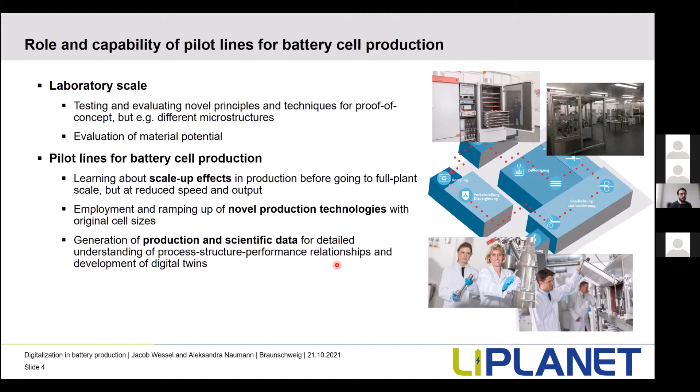One important part, especially for digitalization, is the generation of data. Data is the most important thing when looking towards research and digitalization in production facilities, because we need a lot of data to gain insights into the process. This is the great thing about pilot lines - we are able to gather as much data as we want and use that for our specific use cases. As we're talking about digitalization today, the aim is understanding the process-structure-performance relationships. You will hear this term quite often, to better understand the complexity behind single processes and products along the production process, and try to improve certain steps.

Now we will jump quickly into the timeline of the Battery Lab Factory. I don't want to give you deep insights of the Battery Lab Factory Braunschweig, since I think most of you are already familiar with it, but just a short overview. You will get the slides in the end of the presentation anyway, so you can use that as reading material.

Or if you want to get in touch with us, talk to us. We started in 2007 with our first activities with industry, looking more closely at battery production. The first process we looked at closely was the calendering process, understanding the interrelations of calendering within the production of single cells. In 2014, we started with the official building of the Battery Lab Factory Braunschweig, which was funded through an EFRE project we got in 2011.

So now we have an in-place facility with different dry rooms and a large facility for testing and evaluating the production process. The Battery Lab Factory is part of the ProCell cluster, which is a German excellence cluster, a German competence cluster, looking at the production process of lithium-ion battery cells since 2016. Professor Kwade, who is a professor at the Battery Lab Factory Braunschweig and the iPAT, is the head of the ProCell cluster.

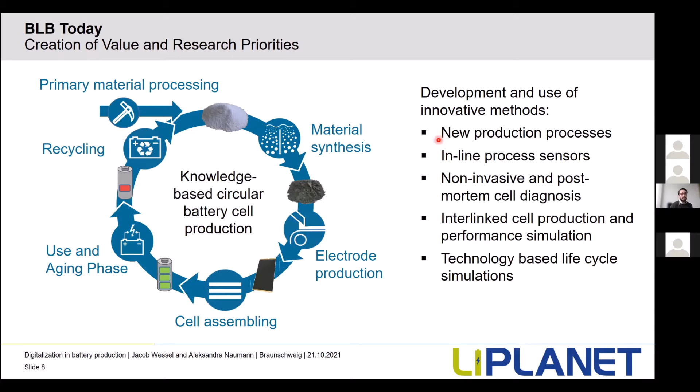We focus mainly on new production processes, so we do not look in detail at new cell chemistry or cell technologies. We do that, of course, but the main focus of the Battery Lab Factory is on the production processes, and here trying to improve those by means of new technologies. So something like inline process sensors are, of course, important, understanding a bit better what actually happens inside the process.

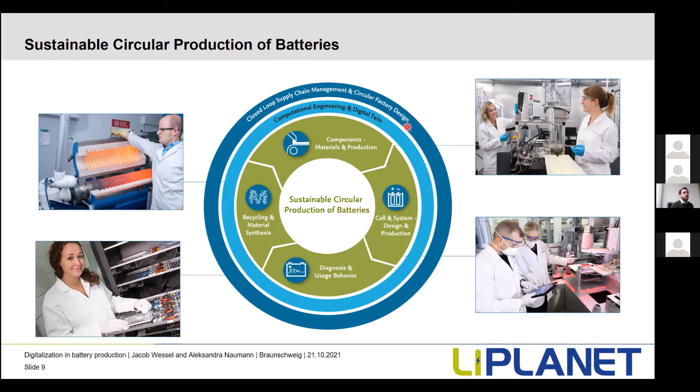I've touched on that earlier today, just a few minutes ago, but I want to explain it a bit more in detail why it's so important.

The battery production system itself is quite complex, as we all know. It has many different challenges, many different products and processes, and all those processes and products are interlinked and have interdependencies along the way, influencing the final product.

What is complicated and difficult to explain is the interrelation between a process and the final received property of the battery cell. So how does a single process influence the final property of a cell, for example, the discharge capacity.

There's no essential understanding on that yet, and we try to build that by going the way of process to structure and structure to property.

We understand quite well how a single process influences a single product, an intermediate product in the production chain itself. So how does the mixing influence the structure of the slurry that is produced? We know that, and we can describe quite well the properties of that single product, the slurry in this case.

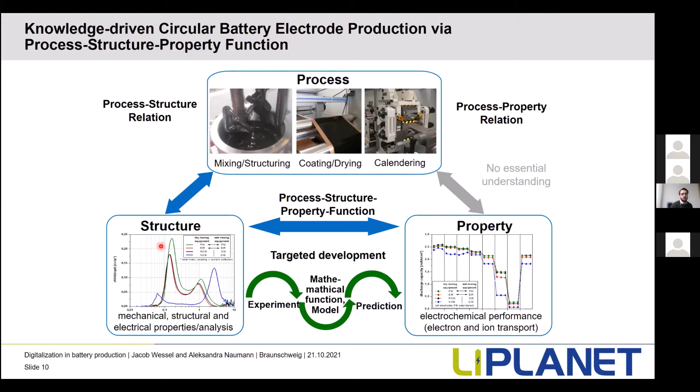So you will see how we embedded this process with our facility, how we go from process to structure and from structure to property in the next couple of hours.

I've mentioned that before. Today we are here mainly focusing on computational engineering and digital twin. What we aim for here is to foster a comprehensive understanding about data acquisition, data storage, and how to enable, by those two important parts, a cyber-physical production system, hereby bringing knowledge back to the production facility by the means of gathered data and analyzing and understanding this data.

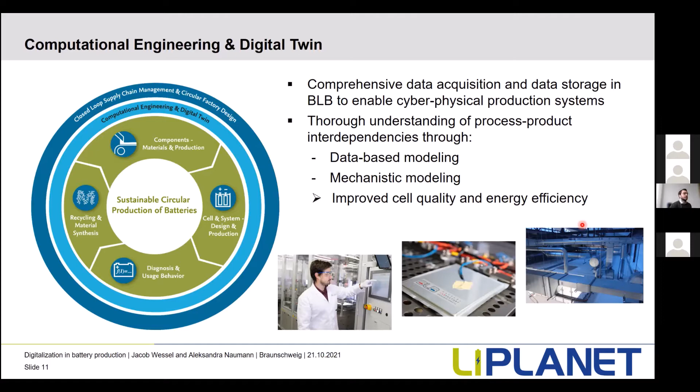After this introduction, I want to continue with the motivation and introduce the most important term, which I've touched on previously: the cyber-physical production system.

When talking about digitalization, you immediately think about Industry 4.0, because those two terms are quite closely linked together. Digitalization and Industry 4.0 are not the same. This is quite important to say, but digitalization normally comes before the part of Industry 4.0.

Digitalization is a term that has been around for a couple of years, starting with the third industrial revolution. I will touch on that later. Industry 4.0 takes the means of digitalization and scales them up, further using them to better understand the insights of your production facility by enabling cyber-physical production systems, digital twins, whatever you can think about.

Industry 4.0 describes the fourth industrial revolution. Some people call it a revolution, some call it the evolution. I don't want to touch on that today. I just want to talk about where it comes from.

We started with the first industrial revolution, as you all know, by introducing mechanical production plants powered by hydro or steam power, which scaled up the productivity of a production environment, previously done mainly by manual work.

The second industrial revolution introduced the term of mass production, with the first production chains, which introduced division of labor, hereby increasing again the efficiency of production systems by dividing tasks to specific workers, and workers performing this task and increasing their activity efficiency.

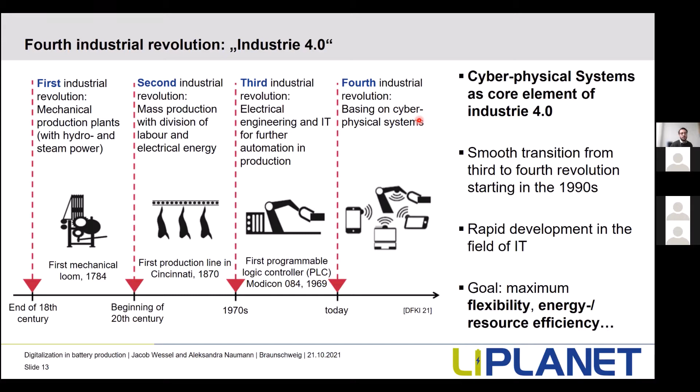With Industry 4.0, you're able to reduce lead time by avoiding discontinuities, like scaling up your production, speeding up your production, and better knowing what happens when you do so. Also, which is quite important because we are from the Institute of Sustainable Production, you can increase energy and resource efficiency through digitalization and Industry 4.0, using less energy and less material.

In specific for cell production, it's quite important to reduce scrap, and hereby reduce the environmental impact of the single production system or the product on the environment.

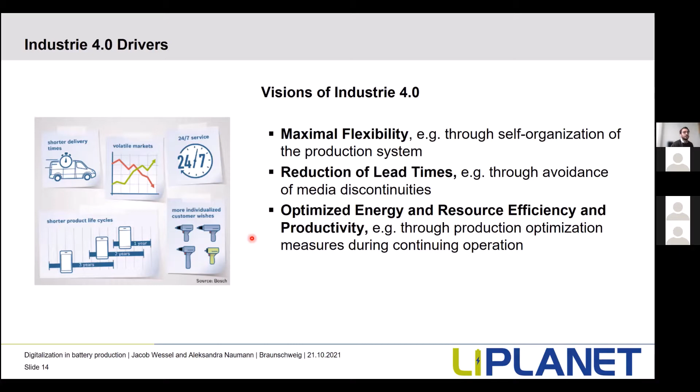So we have talked about the cyber-physical production system before. Now I want to introduce the different elements of how we understand a cyber-physical production system. In general, it is divided into four elements: first, the physical world; second, data acquisition and management; third, the cyber world; and fourth, decision support and control.

What we understand behind the physical world is basically the business understanding—defining your process, explaining your process, knowing about the process, what you actually physically see. In this case, it can be a factory, a single process, or a product.

This physical world is connected to data acquisition by means of different technologies. We will talk about industry communication protocols later on, such as OPC UA, Profinet, and Modbus—there are many more, and we will give an example later. But we also have a lot of manual data, or just data that you want to have within your databases to later use for different approaches.

Data acquisition is also a topic we will talk about later. There are different parts and elements within that element: data acquisition, data management, and also data provision—how we can provide data to the next element, which is the cyber world.

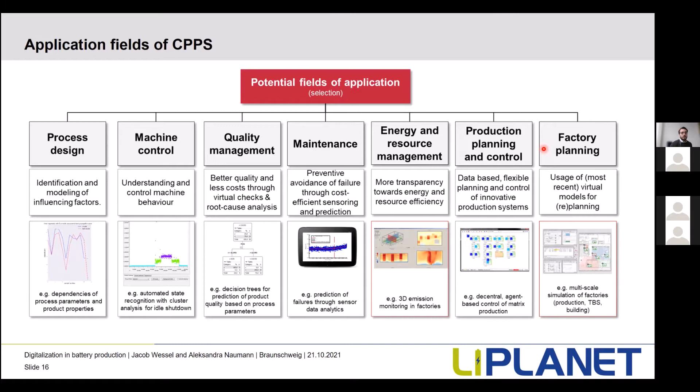Energy and resource efficiency is quite important, also using visualizations, using data that is gathered, making logic of the data, showing the worker how the energy was consumed during the production. Increasing transparency is quite important, but also factory planning comes with the cyber physical production system. By knowing better about your system, you can better plan your factory, either by adapting the facility that you have or using the knowledge that you gathered for new planning cycles. With that, we're done with the first part.

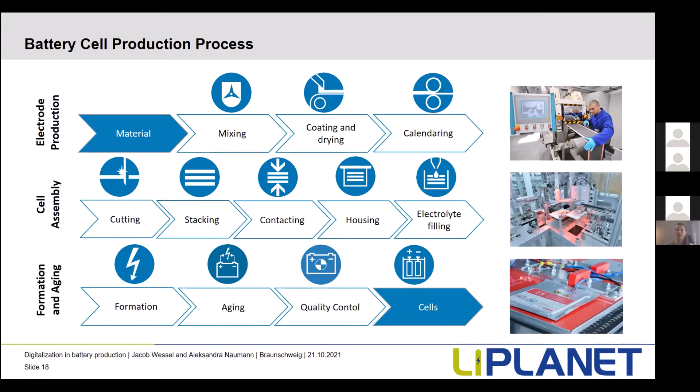The challenges in battery production are that we have many process steps that I just mentioned. They are very complex and they also depend on each other, with all the input parameters, requirements and restrictions on the left, and on the right the quality criteria, which are very important, of course. To obtain the best quality, we have to see that there are many influences on the production process. We have different challenges, for example the combination of continuous and discrete manufacturing: continuous manufacturing in the very beginning, and discrete manufacturing in the end.

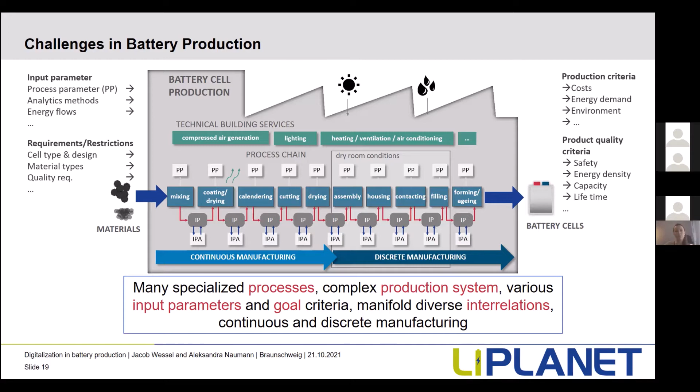Other influences are, for example, the technical building services, such as the dry room conditions which we have for some of the process steps. This just means that we have many variables and parameters that influence our process, so it's more difficult to have a fitting quality management system, which is also shown here. We have many different process steps with all the parameters and product properties, and also intermediate product properties. And these are all challenges for quality management in the end.

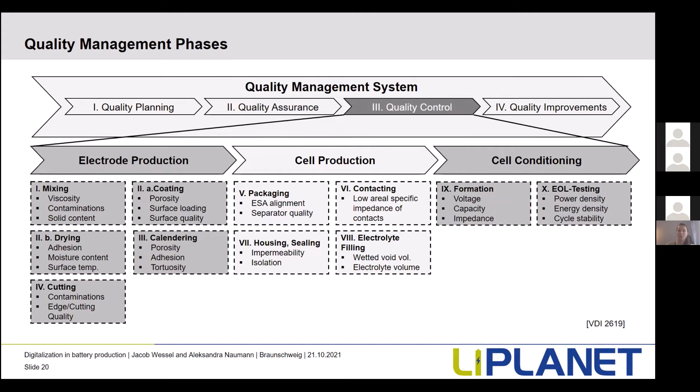As for the data acquisition, which is the next step in the cyber-physical production system, we have different goals, especially the economical feasibility, which means we need fitting information and communication technology, which also supports innovative systems. So we also need high temporal and spatial resolution of the data, because all the data we gather is the basis for what we do in the cyber world. And if we don't have sufficient data, we might not have the results we would like to have for the quality in the end.

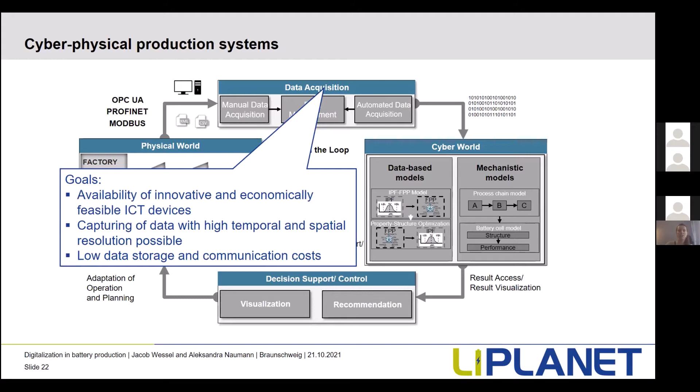And for the economical feasibility, we also need low costs in data storage and communication. I would like to show you now how we did this in the BLB, what our data acquisition concept is. First of all, we of course have the physical world with the machines and the processes, and the cyber world as well. In the physical world, we have the data acquisition, which can be automated data acquisition or manual data acquisition. Since not all the data can be collected automatically, we also have the manual data acquisition.

But for the automated data acquisition, we have the machines that can gather data, and through communication protocols like OPC UA, it can be transferred to the cyber world. In the physical world, the manual data acquisition is also a possibility for data that can't be collected automatically. And for this data, we need someone to type in or to upload the data in any kind to the cyber world.

And between those two, we have the tracking and tracing, which is some kind of combination between those two, because we have automatically gathered data and manually acquired data as well, like operational data. And all these data can be combined in the end in a data warehouse in the cyber world. And the data gathered in the data warehouse are the basis for the visual analytics or data mining methods, or any other use you might have for the data.

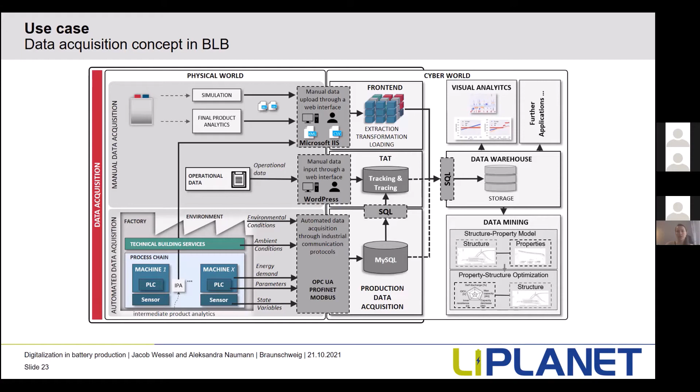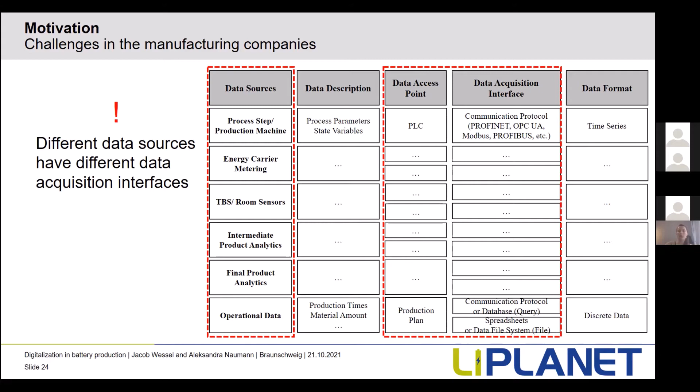So the key message of this is that we have different data sources, and therefore we need different data acquisition interfaces. The data sources can be very different. For example, the most simple case, I think, is the production machine. And for this, we might have the data access point of a PLC. And the data acquisition interface would then be the communication protocol like OPC UA. But we can also have many other data sources, and therefore also other data acquisition interfaces. And we have to combine all of these to be able to make other statements out of that.

Originally, the industrial automation pyramid was used to show the different hierarchy levels in a plant. So the interfaces were between those different levels. But with more complex applications, we now have a CPS-based automation, which means we have many different modules which are linked through different interfaces, and we don't have this hierarchy anymore, or at least not to this extent.

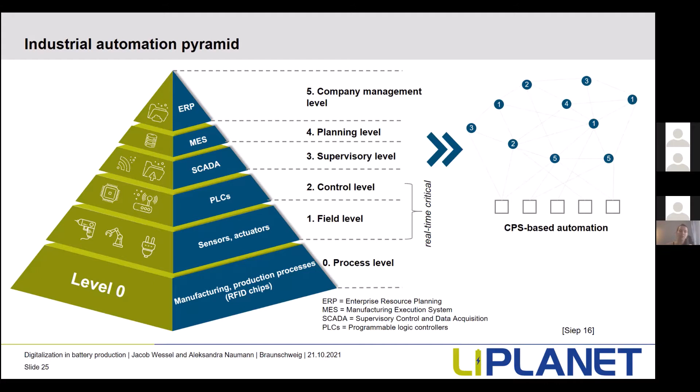For the communication itself, we have different participants or different possible participants of communication. The most simple one is the human-to-human communication through language or body language. Then we have the human-to-machine communication, which might be through different interfaces or simple dashboards, for example, cloud services. The machine-to-machine communication is something like grid computing, and we also have object-to-object communication, like the IoT. And between those kinds of communication, we also have analogies, which are easy to explain with the communication protocol.

So the communication protocol is basically just a set of rules to make it easier to communicate between different machines, for example. And it gives a frame for this communication and ensures that all the partners just speak the same language and understand each other. If you imagine two people speaking to each other, that's quite similar. One person says something and the other one replies. It's quite much the same with communication protocols. One asks something or says something and the other one replies.

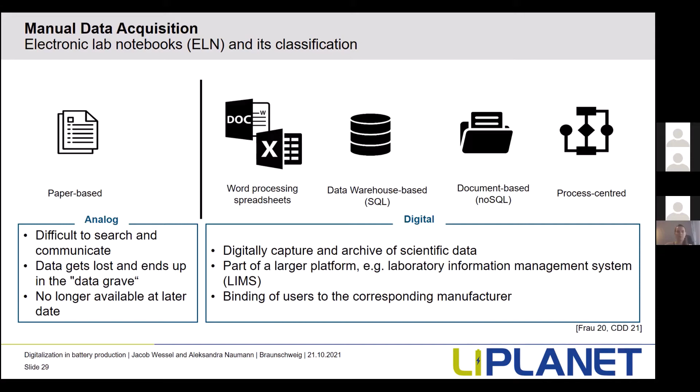And through this interface, also data upload and download is possible. This is especially important for the manually acquired data. And the whole data warehouse is based on Microsoft IIS. This whole thing again reminds us of the different data sources, since we have the combination of automated and manually acquired data again.

Next, I would like to talk about tracking and tracing, which is quite important so that we can see the interrelations between the different process steps and trace back material we used. Traceability is very important for the quality management, and the word traceability itself is the ability to trace the history of application or location of an object, while tracking means the other way around. So we go from the start to the very end with one material, for example.

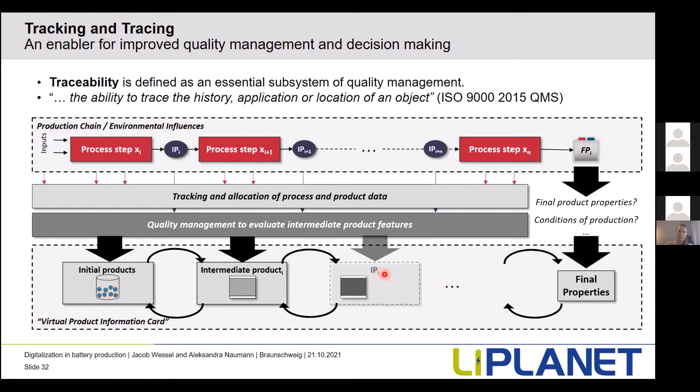And like I said before, all these products or intermediate products influence each other, and if we are successful with our tracking and tracing and other things we can use, we can trace back the properties and also the interrelations of the intermediate and final products.

We have a solution for this in the BLB as well. The tracking and tracing platform, which we can use for production planning, and we can allocate the used material through this tracking and tracing platform through an HMI, human machine interface, at each process and machine. And so we can see the product history and trace it back.

Next, I would like to talk about the data storage and management after we have seen how we can gather data and how we can trace products back. We want to store this data and manage it. Therefore, we need to understand what the difference between data storage and data management is. Data storage, first of all, is when we know what type of data we have, where we have it, and how the software or hardware holds, deletes, backs up, and organizes the information. And the data management is more of a practice of constructing this framework we need to store the data and to archive it.

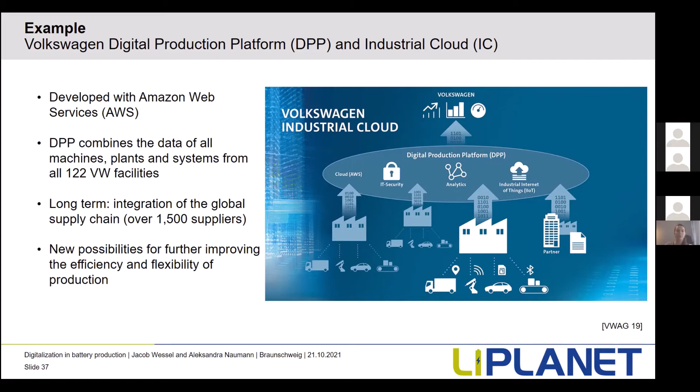And one example for a platform might be Volkswagen. They combine all the data of the machines and plants they have from their 122 facilities. And over a longer term, they also want to integrate the supply chain as well, so that they can improve their efficiency and also the flexibility of the production. And therefore, they use the digital production platform and an industrial cloud.

Next part would be the cyber world and decision support. First of all, I would like to talk about the modeling and simulation. As you can see, we're in the cyber world right now, and for the modeling and simulation, our motivation is to predict the behavior of processes, machines, and production systems, as well as factories. And now we could ask ourselves, why are we even modeling and simulating?

These are quite recent examples where simulation was used. You can see they all have something in common, that they use simulation or modeling. And the reason for that is that simulation helps us to describe systems that are just too dangerous, expensive, or complex to explore experimentally. And additionally to that, we can also visualize the systems, which might not be possible as well in the real world.

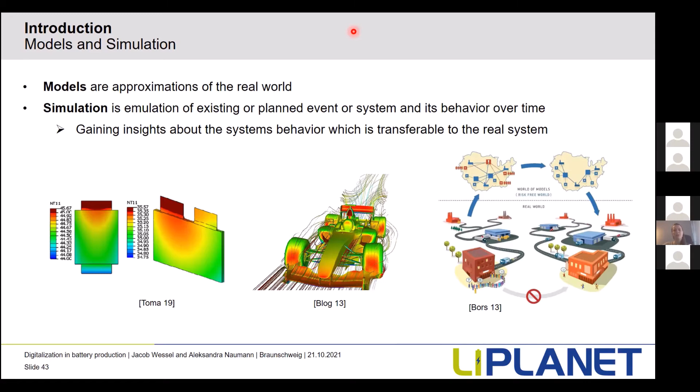The models are essentially approximations of the real world, and simulation describes, I would say, the practice of emulation of events or systems over time, so that we can gain insights into the behavior, which we can then transfer to the real system. And there are many different benefits besides the ones I just mentioned. We can also explore processes that just rarely happen in reality, just to understand the dynamics of this in a better way.

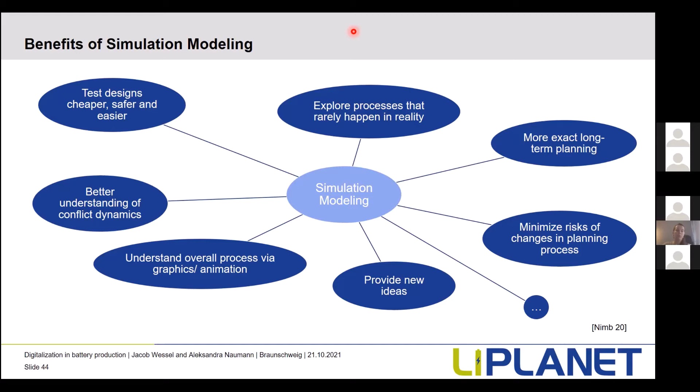And we can, of course, plan more exactly based on our simulation. We can have new ideas through this simulation. We can visualize and also minimize risks before we invest in something that just wouldn't work for us. The different types of modeling are shown here. First of all, we have the physics-based modeling. Therefore, we just have physical principles and mathematical models that are based on these physical principles.

The second one is the data-based modeling. For this, we have gathered our data that we just talked about, and the data describe the aspects of the model, for example, via regression analysis. The third one would be the numerical modeling, which is, for example, CFD or FEM. And therefore, we have the objects which we can decompose into smaller elements. If you think about CFD simulation, for example, we have different simulation cells that are just smaller elements of the bigger one. And then we can look into the specific cells and see what's happening there.

One possible application for that would be weather forecast, where you can see it every day, so to say. The fourth one is the Monte Carlo modeling. It's used for different outcomes. So we have a model with always the same input parameters with different outcomes, which cannot easily be predicted, and therefore Monte Carlo can be used. For example, in the finance sector, but also in engineering, of course.

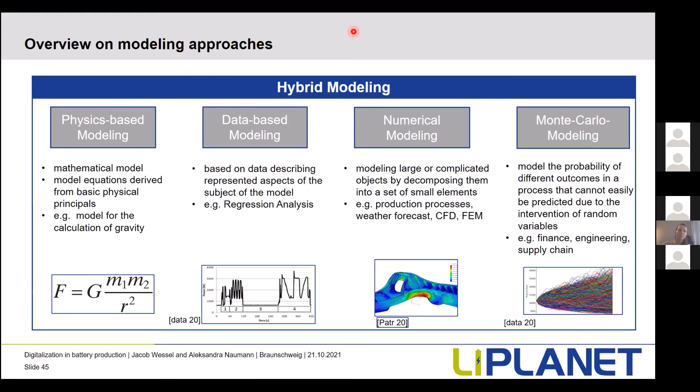System dynamics and dynamic systems are other modeling ones as well. For system dynamics, the behavior of a corresponding system is described, and it can be used, for example, in supply chain management. Dynamic systems, on the other hand, is based on mathematical models of dynamic systems, which consist of state variables and equations.

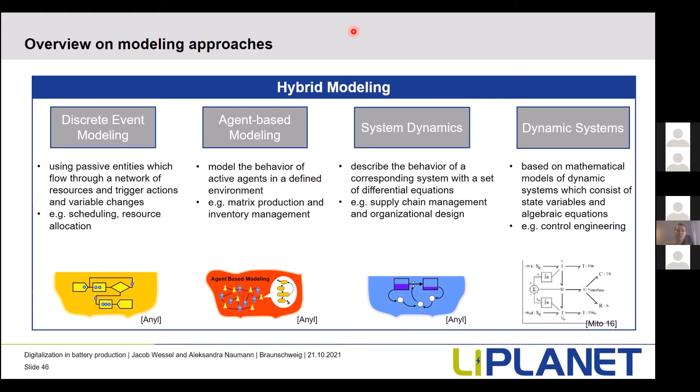These different modeling approaches can be combined, which would be called hybrid modeling. So different modeling paradigms are therefore combined, and it's becoming more and more common practice since the systems we model are getting more complex.

Another approach is multi-level, multi-scale simulation, which means we can simulate multiple levels, for example, from a process over a workstation to a whole factory. And we can also simulate multiple scales, from molecule to material properties, or from seconds to decades, which means over a bigger time frame.

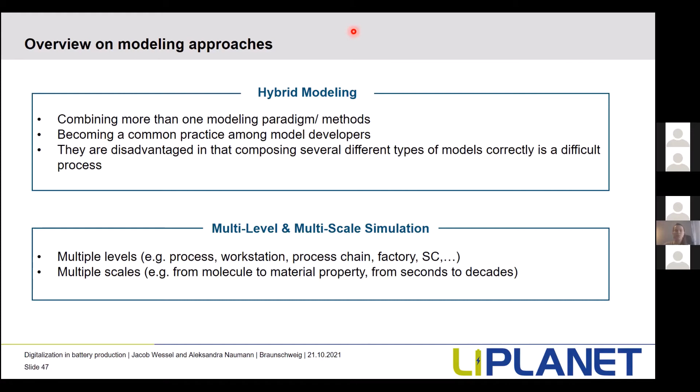One example I brought today for mechanistic modeling is the project Sim4Pro, where we have a process chain model connected through structural parameters, where the process steps are connected through structural parameters. We also have a structural surrogate model to model the structure of the electrodes themselves, so that we can link that structure back to the process again.

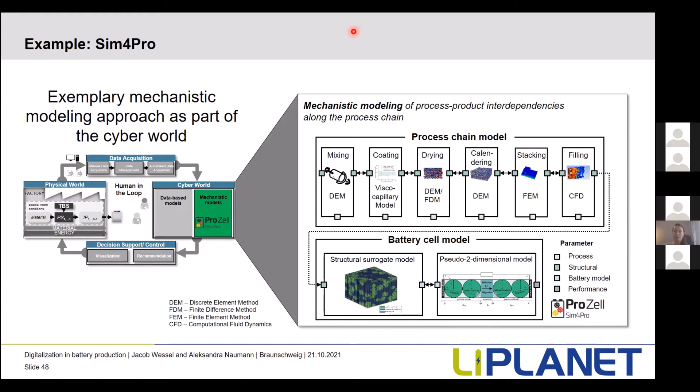Okay, so now the data analysis and data mining follows, and I would hand that over to Jakob again.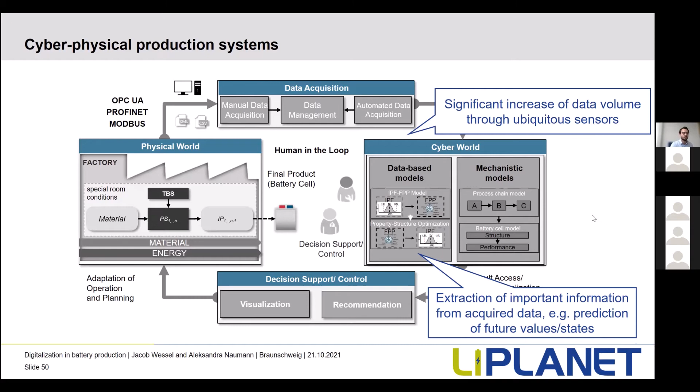Perfect. So we will start first with a brief introduction into the terms that are important around data acquisition, data mining, and data analytics. When you normally look to find papers, ideas, and previous knowledge about this topic, you normally first stumble upon the term knowledge discovery in databases, the KDD process. The KDD process basically describes the process of how to extract and discover information and knowledge within databases.

Within the selection step, the target data is selected. So basically, you try to sample your data, look at the data that you want to use, maybe perform the first correlation analysis to see, okay, does the data actually help me or not?

In the next step, the pre-processing, you process this data. You try to fill in gaps. So missing data is either excluded or you try to include it by means of statistical analysis or whatever you can think of. Also, normalization of your data normally occurs, so that you scale your data within 0 and 1, so you don't have the absolute values, but the normalization of the values.

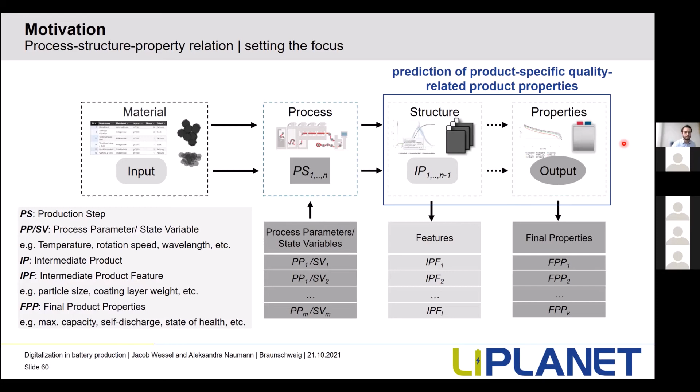What we have done in the recent past is a data mining project. We included in our data mining project about 200 cells, Z-folded pouch cells, with 15 or 10 compartments - so 15 anodes and cathodes, or 10 anodes and cathodes within a pouch cell.

We have described before our data acquisition, how we actually achieved the gathering of all the information along the process chain. We've seen this picture before, and the map of the battery cell production enabled us to gather all the information on the different intermediate product features along the production chain, to know what information we need to gather and how that can be summed up in a database for our data mining project. Here you can see a simple image of our pouch cells.

So first, we stuck, of course, to the CRISP-DM process, which we described, and we performed the basic tasks of data preparation. We started with about 1,000 intermediate product features describing the entire production process. So all 16 different intermediate products were described by their intermediate product features, and the 16 products brought us 1,029 intermediate product features.

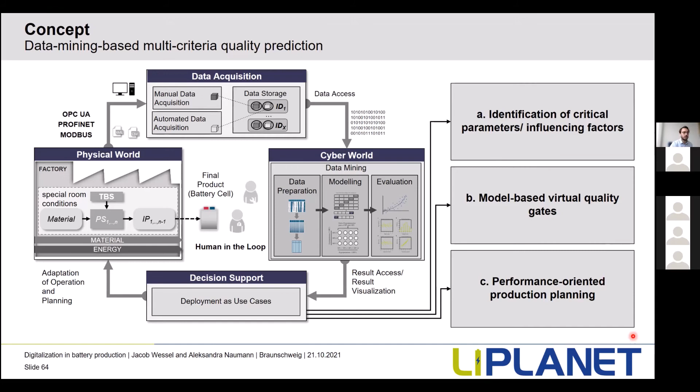I just want to focus today on the model-based virtual quality gate, because I think it's quite handy and a cool use case, and good to explain. So, quality gate—I've tried to explain that briefly here again with some pictures.

So what you can see here is just the production chain with its influencing parameters, described by a production step, an intermediate product, and a later final product. Each intermediate product can be put into context with its quality and the intermediate product state.

So the intermediate product quality can be determined within a quality gate. That information, which you can see here just as a sketch, can be used to determine or predict the final product property. Here we focused on self-discharge, max capacity, capacity decrease, inner resistance, and OCV. So we can determine with the intermediate product state the final product property, and we can go along the process and determine if the intermediate product changes, how that actually impacts the final product.

In the first quality gate, we see we are within our ranges that we set, within our target value with its ranges. In the second step, we see we are now outside of those values, and we can predict with that the final product property and see that the FPP has shifted.

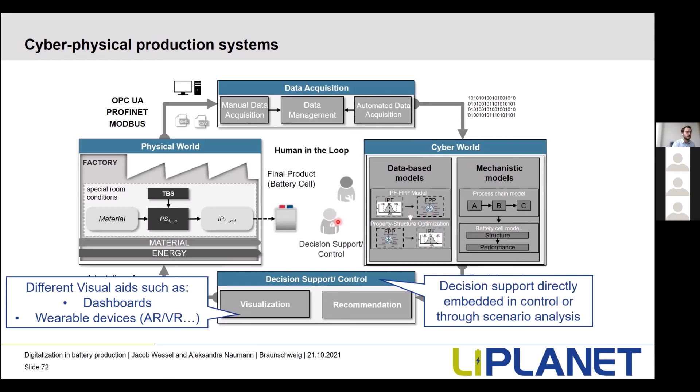I just want to briefly talk, really briefly, about decision support and control - the last element of the cyber-physical production system. I've already shown some works towards that within our data mining use case. Quality management and model-based quality gates, of course, can also be deployed, as you've seen, within the decision support and control element.

First, when you talk about decision support and the feedback loop back to the machine, you have to think about how a human and a machine interact, and compare, of course, a human to a machine, because you will always have the information brought back to the human. The human needs to take this information, that knowledge that is gathered through either the simulation or the data mining or database models, and bring that back to the process and to the machine.

And there you can look, of course, machines and humans are similar in some ways. We have cognition, that is basically the sensor in a machine. We have senses, and sensors also in the machine, and we have actors, our arms, our fingers, whatever you can think about, and we have also the actors at the machine. So either the gripper or the extrusion unit, whatever you can think about, and we have an interface to communicate with that. And the communication with that interface can be a simple computer, it can be an HMI device, it can be a lot of different stuff, and the interaction between a machine and human is quite important.

So giving the human an opportunity to step in contact with the machine and the process, and giving new information to the process, or maybe adapting the process in some ways, is quite important. You can, of course, foster an understanding of what is actually happening by process monitoring. For that, you can use real-time visualizations, dashboards, monitoring devices. You can, of course, have simple lights on your machine. Is the machine running according to plan or not? Can you maybe adapt something there? That can be, of course, offline or online. There's a lot of different stuff out there.

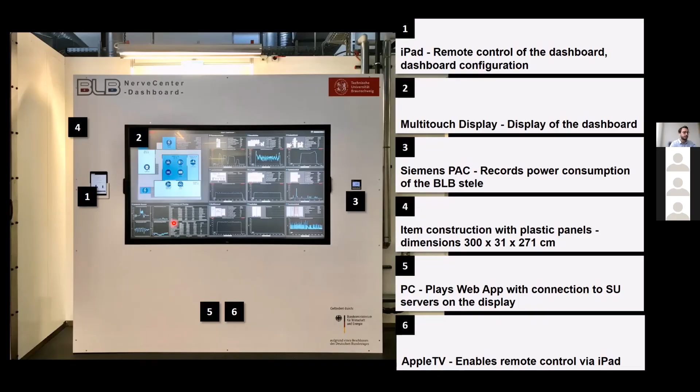Here is a closer look at our dashboard. It's a web-based dashboard which enables us to visualize different web pages within those different images. We use standard technology for that. It's the iframe technology, similar to YouTube, where you have different web servers behind those different iframes, each visualizing one certain web server with its visualization.

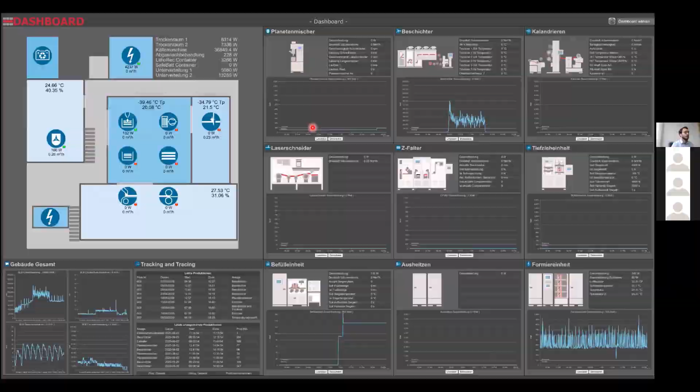Apart from simple transparency through monitoring, you can, of course, use technologies such as virtual reality or augmented or mixed reality in production environments. You can use virtual reality to test something, to test a new process, to see how you can interact with the process. You can, of course, use it also for education. So if you want to educate your worker or even the student, virtual reality always helps here.

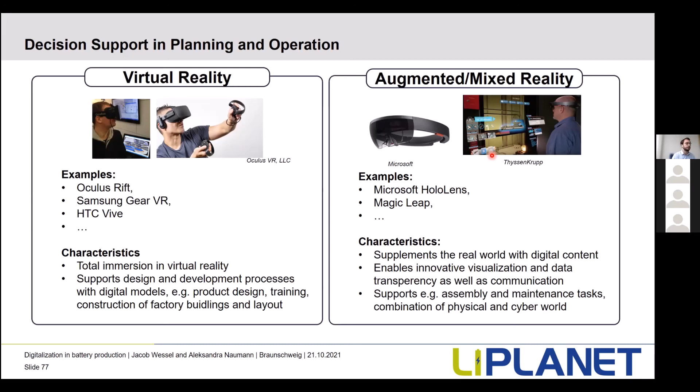But also here, if you have visited the seminar of Professor Franco or will in the future, he will take you on a closer tour of virtual reality and augmented reality. I just want to briefly mention it here. With that, I will jump into the summary and outlook, and hopefully we have some more interesting questions or discussions.

Yeah, since we have a few minutes left, I think.

So what you should have learned today is basically a brief overview of our understanding when talking about digitalization. And in our understanding, the core element of digitalization, Industry 4.0, is the cyber physical production system. The cyber physical production system basically explains each element which you need to take care of when trying to enable complete digitalization within your production facility.

Because you have this physical world we have described today to you, how that might look. It's different, of course, at our facilities compared to yours. You need a clear understanding of your facilities. You need a clear structure in your physical world, your physical system. You need a machine. You need, of course, different sensors of the machine. You have the factory. You have to describe all this and learn about this and know from that what information you can actually gather.

We have talked about data acquisition briefly today as well. We gave you some ideas of what the first steps might be, mapping your processes, your intermediate products, your different data sources that you have, summing up the information, how you can actually gather that data. You have seen the table that Aleksandra presented. There are also technologies out there, such as SCADA systems. I don't want to mention any names again because I've done that before. There are a lot more technologies, not just one, but manifold.

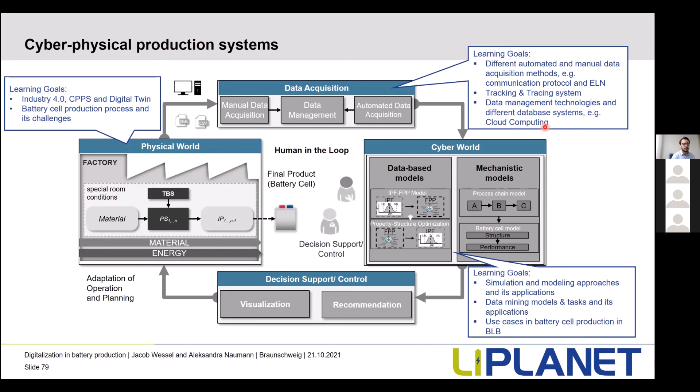We've talked about data management and technologies here. Briefly, we've mentioned SQL databases, NoSQL. We've mentioned cloud computing. It's up to you what you want to use, up to you on what technology you actually want to decide. Within the cyber world, we've talked, as I mentioned before, about simulation and data mining. We've presented you a use case from our facility, but there are a lot more use cases out there, not just from our facility, but also from others. So feel free to look at all the different publications. There's actually a lot of stuff happening within the topic of the cyber world and battery cell production, and that's why it's so exciting.

Then the learning goals concerning decision support. That was really brief today, but of course, you need to understand the human-machine interface within the loop of the cyber-physical system. So how does the human actually interact with its environment, and also how you can solve issues towards maybe process monitoring with different methods.